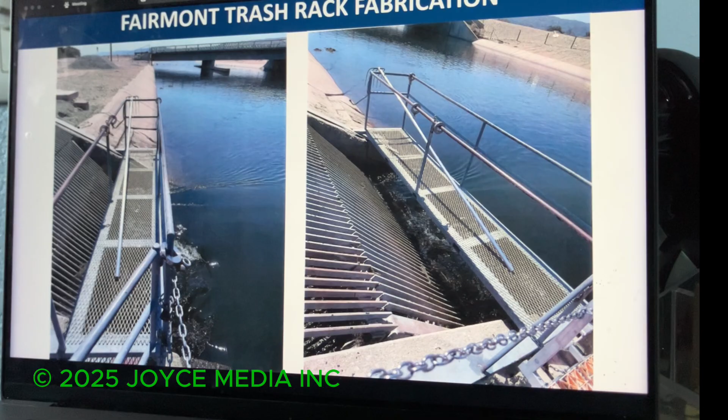Also, while they were out there, Holly, if you go to the next screen - there you go. On the left, way in the background, you can see there's 2 moss screens quite a ways away from the grate. Those moss screens, if you look to the right now, Holly, point to the right, see that hood that's got the opening in the back, it's all dented up. Years of wind, years of heavy things going through the grate, bending that hood up. Now when the sprayers spray that screen, you have moss and algae and things that are just really going everywhere.

So it's just not a good condition. So we thought, well, while we're doing this, why don't we have them build new hoods and new covers for these moss screens? And so they proposed building new covers with access panels out of stainless steel for $35,582 to build and install.

So the total price to International Water Screens to do this work would be $117,552.20, which is quite a savings over the $225,000 that the board had already allocated. So we think this is probably a good way to go.

We did contact Farm Pump and Irrigation because they do screens also. They faded out of the screen business, then they tried to get back into it, and they were non-responsive. There's very few traveling screen makers left in California, so this is somewhat of a sole source. We recommend going with IWS, International Water Screens, for that amount. Happy to answer any questions.

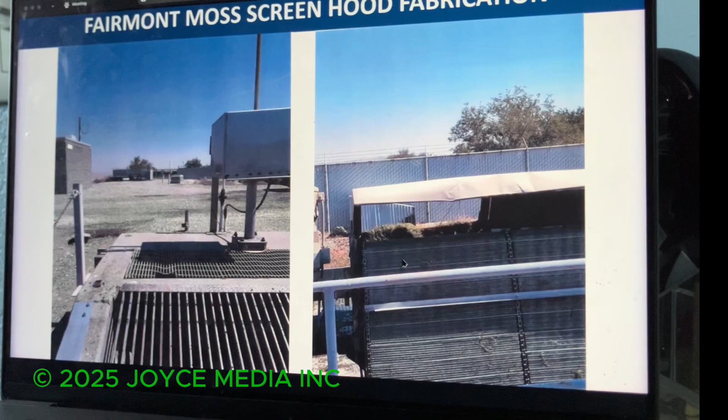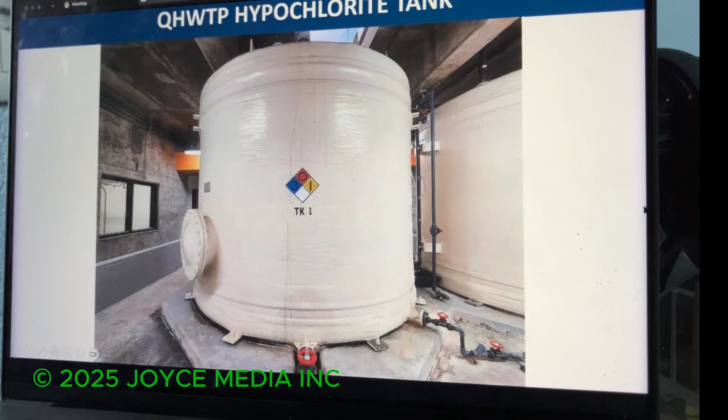Okay, so our last purchase order, if we go to the next screen. So Quartz Hill, this Quartz Hill plant, we transitioned from chlorine gas for disinfection to sodium hypochlorite back in the early 2000s, I think it was 01. So the original two hypochlorite tanks, they're indoor, 8,000 gallons each, are tanks 1 and 2.

Then when we did the expansion, the disinfection byproduct expansion in 2010, we added 2 more tanks. We have 4 tanks, 8,000 gallons each. This tank number 1 is the original tank. It developed a crack, so we had to drain it, dry it out, and we have to get it repaired.

This tank was repaired in 2017 by American Fiberglass. They're an East Coast company, the only one we could find that would come and do this work. They did several tanks for us, but the last couple haven't weathered as well as we hoped.

You should be able to get 12 to 15 years out of a rehab of a hypochlorite tank. So about 3 or 4 years ago, we contacted D&T Fiberglass in Northern California. They came out, looked at what we had, and said they could do the work. They've done about 3 or 4 tanks for us. Their methods and techniques are modern, and they do a great job. So we reached out to them to do this tank.

Now the question is going to be asked, and the finance committee did ask this: why don't we just replace this tank? Why even fix it? I'll let you go to the next slide.

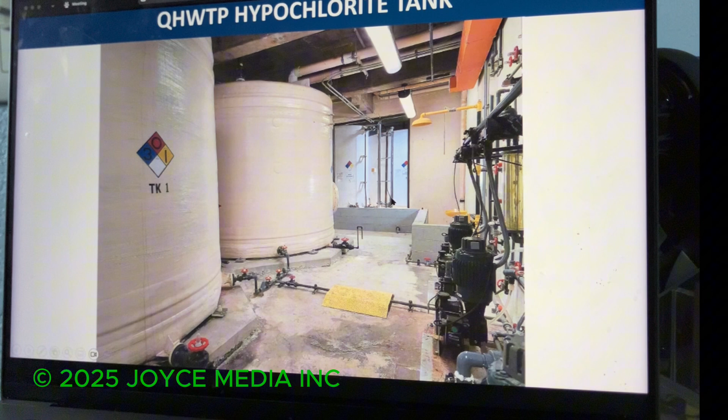A picture's worth 1,000 words. You see way in the distance, tanks 3 and 4. There's no way to get tanks in and out of that room. You'd have to cut tank 1 apart and remove it in pieces, then bring a new tank in pieces and laminate it in place. And the seismic requirements currently are more stringent than they were in 2001, so you'd have to change the anchoring of that tank.

So we feel it's more prudent to just repair this tank. If you have to repair it every 10, 12, even 15 years, you're still money ahead. I'm sure it'd be well over $100,000 to replace this tank, and it would take quite a while.

So we recommend going with D&T Fiberglass to do a full rehab of this tank: new bottom, laminate the sides, new fittings. The total price would be $47,400, and they can get it on the schedule probably in October or November at the latest.

Happy to answer your questions. I have a question, John. What about the seismic considerations? Is there a big difference?

Not a huge difference. You'd have to add more anchors, but Rob raised some good points on this. My response would be, if you're going to do it to this tank and that adds cost, why wouldn't you do it to all the tanks? My feeling is, were the seismic requirements in 2001 insufficient? Are earthquakes bigger these days?

I think it's like anything with engineering, no offense, but I think engineers look for ways to generate work by increasing seismic requirements. Some are necessary, we saw that from the Northridge quake, that's when a lot of things changed in '94, whenever that was. They became very strict. So I think the '01 seismic requirements for tank anchoring are probably sufficient to what we have now. I don't think we should spend a lot of extra money to do that. That's my opinion.

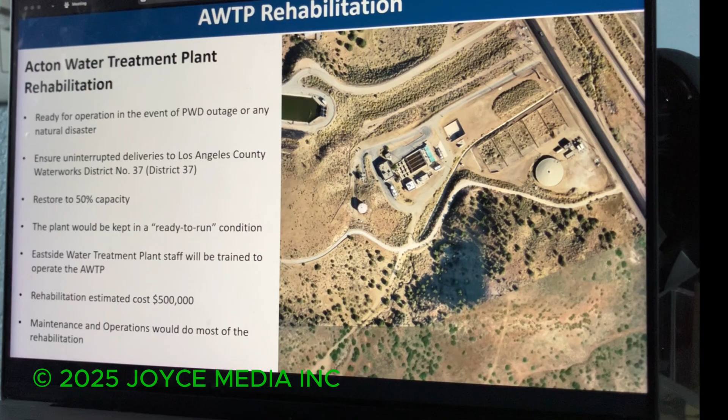So, timeline: 1990 built. 1993, the county said, hey, we don't need the plant, take it offline, we have plenty of well capacity. So we took it offline. 1998, development out at Acton, they said, hey, let's bring this plant back online. So we did that. Then in 2008 we did the DBP upgrade, and in 2010 it was complete. 2011, we did the agreement with Palmdale Water District, which has worked very well for us.

So here we are in 2025. The question I would ask is, why now? Why now? There you go. So you think alike - so why now?

Well, have you guys noticed that we've had a lot of leaks lately? We're coming to you with leaks - we've got to repair this, we've got to repair that, because systems are getting older. And Palmdale's systems are getting older, just like AVEK's system. Thus far they've been very dependable, but perfect storms happen all the time in our personal and professional lives, and it happens. So we're vulnerable. If Palmdale can't supply water, District 37 isn't going to look to Palmdale and say, hey, we have an agreement - they're going to look to AVEK. So we looked at options: if we can't get water from Palmdale, what would we do? And the only viable option is to get the plant back in shape to run. I can't think of any other options - we beat this thing to death, there's just really no other way. So that's why we're bringing it to you. We've identified a vulnerability, a risk, and we think risk versus reward - $500,000 is a lot of money, but the risk is greater if we can't provide water, especially if it's in the middle of summer.

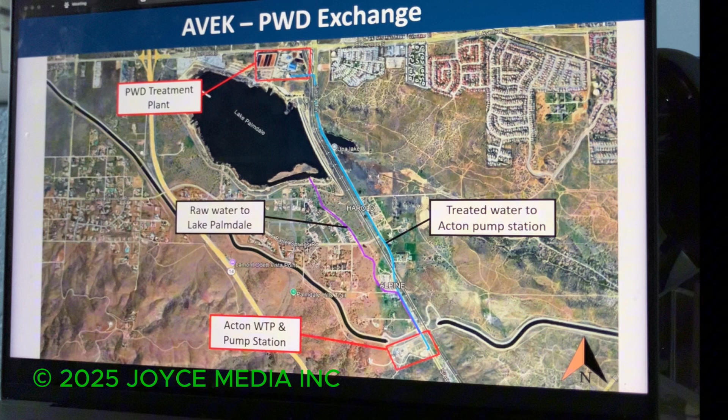So as we talked about, estimated cost would be $500,000. The Water Projects Committee looked at this and they were in agreement. We recommend rehabilitating it to ensure it's ready for operation in the event of a Palmdale outage. This agreement with Palmdale is beneficial to both of us, and we'll keep it going hopefully forever. We'll keep the plant in ready-to-run condition with the Eastside Treatment Plant staff. That's all I've got, happy to answer any questions.

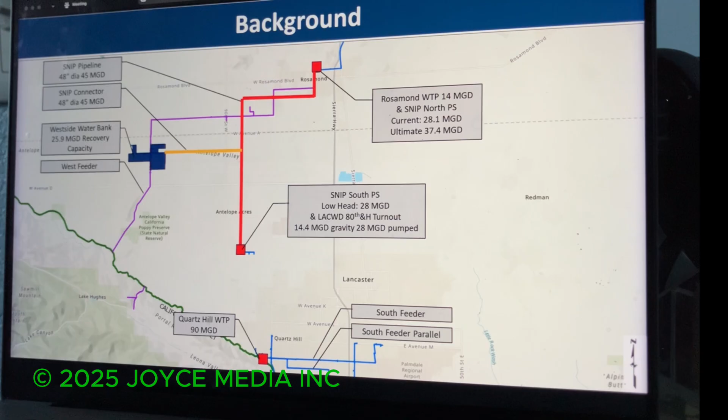And if we click forward, next slide, there we go.

Here's a photo of the SNIP North Pump Station. This is at the Rosamond Water Treatment Plant. You can see the building in the photo on the left. We've got the pumps that you can see inside the building on the right, and those are pumping, as I said, into the west or central feeder up to the Mojave Tank Farms.

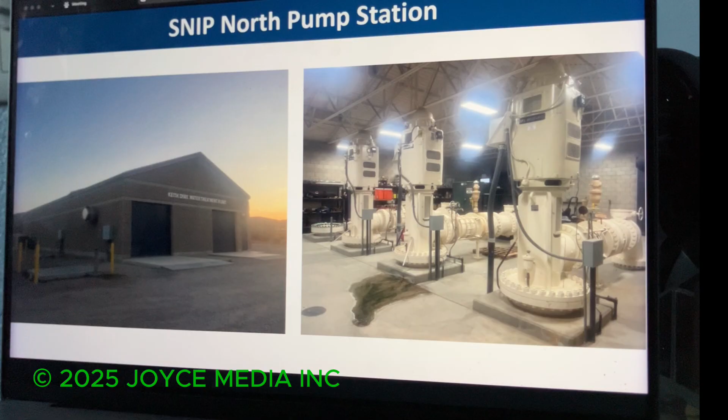Next slide. This is at 80th and H. You can see that building on the left - that's a pretty large building, about 800 square feet, give or take. And the pumps that you see in the foreground here are the 3 low head pumps, designed to pump water into the LA County Waterworks system at 80th Street West and Avenue H.

In the background, it's difficult to see, but behind those pumps are pump cans that were installed with the construction of this building. All the provisions for SNIP Phase 2 were installed as part of the construction of all the facilities there at 80th and H. So in the background, we've got 5 pump cans there to accept future pumps that would be used to pump up the hill to the Quartz Hill Water Treatment Plant along with SNIP Phase 2.

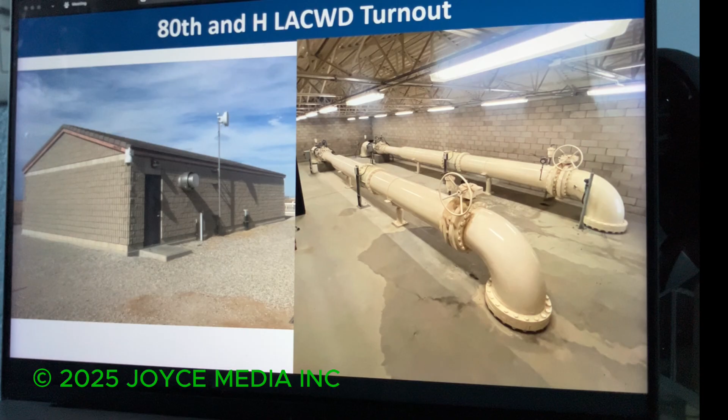Next slide, one more photo. This is the LA County Waterworks turnout at 80th Street West and Avenue H. There's a building inside of the building. We've got the flow control and metering pipelines that deliver the water into the LA County Waterworks system. So again, all already constructed.

This is the same map that we started off with, but now the yellow shaded boxes describe some of the facilities that would be constructed as part of SNIP Phase 2. So we've got about 6.5 miles of 48-inch pipeline, which matches the capacities of the existing SNIP Phase 1 system.

The pump station improvements that are needed - as I mentioned, the building is already there, and all the underground piping to connect into the SNIP Phase 2 pipeline is already there. But we would equip 3 pumps out there. I mentioned there's space for 5 at this point in time. We're planning to equip 3 of those, 9 million gallons per day each, for a capacity of 27 MGD.

But we do have the future capacity to get all the way up to the 45 MGD if needed. That currently matches the capacity of the West Side Water Bank recovery well field, and then we can deliver water through 80th and H as well. So we've got that. There's also 2 new surge tanks that are going to be needed at that site, and then we've got, as I mentioned, the pipeline. So those are the new facilities associated with SNIP Phase 2.

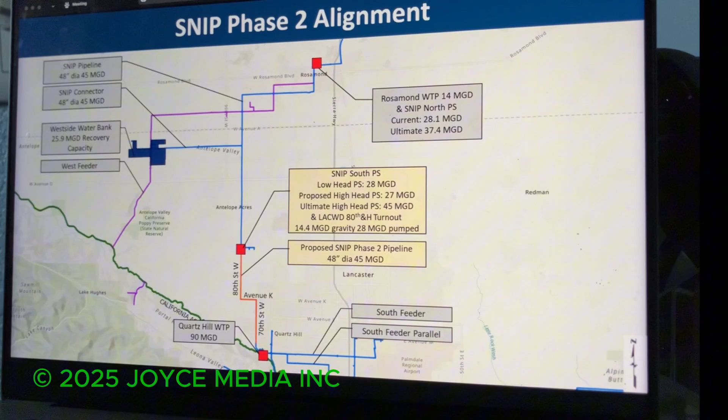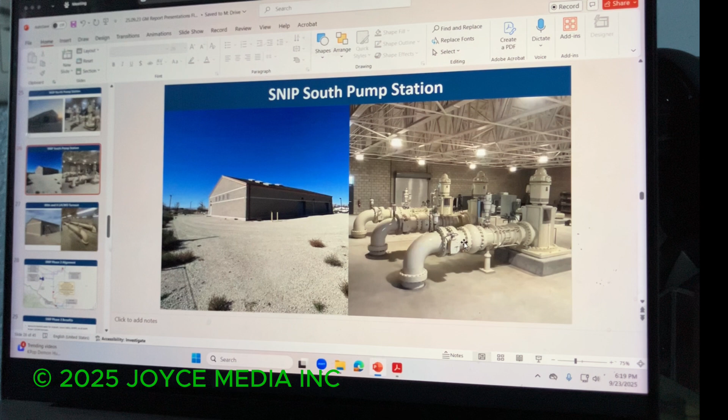Just quickly, what are we doing here? That was fast. Yeah, any questions? There we go. All right.

Just reminding everybody of the benefits we see for SNIP Phase 2, why we approved the design and started on the project. Of course, the biggest one being access to our bank water supplies for the entire distribution system that's served by the Quartz Hill Water Treatment Plant, or historically has been served by the Quartz Hill Water Treatment Plant.

So we are able to recover banked water currently and send that north to our Kern County customers. We can recover banked water and deliver that to some portions of LA County Waterworks system. The maximum that we've been able to deliver to them is about 14,000 acre feet. We did that, I think, in 2021 when we had the second of the 5% years.

But due to some limitations of moving water within their systems, different pressure zones, that's the maximum that we can deliver there. And they cannot wheel water that they receive from us at 80th and H to other parts of their system. So there are some LA County Waterworks turnouts that cannot get the banked water. Of course, none of their mutual water companies customers are tied into any facilities that can receive access to banked water. Neither is our Leona Valley system or Quartz Hill Water District.

So having the SNIP Phase 2 expands the access to our banked water to the system that serves about 80% of our annual demand in any given year. Most of the water that we deliver to our customers is delivered through the Quartz Hill Water Treatment Plant system.

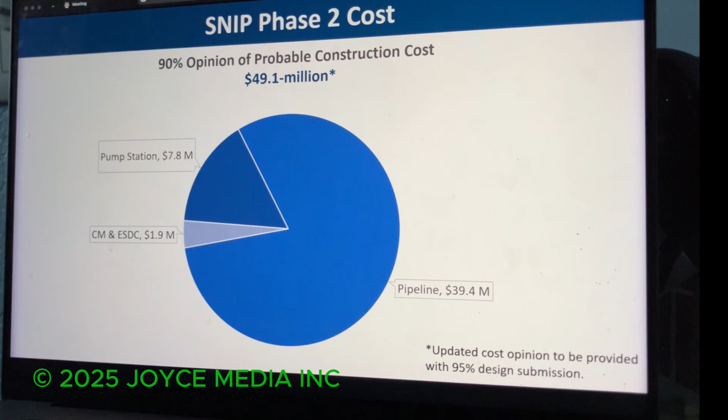The final slide is schedule. I touched on this already, but design should be finalized in November. We bring it back for board approval, and with that approval we would bid the project in the December to January timeframe, then be ready for construction.

When we talked with the committee, we discussed backing out from the grant funding we're seeking, so we've still got some work to do there. We have not adjusted this schedule for where we're at on the grant. We're still talking to the folks we're working with to figure out what that timeline is, but this could push maybe 6 months or so out into the future so we can award the construction in a timeframe where we'd be able to utilize the grant funds.

That's it as far as the status update, but happy to answer any questions anyone might have.

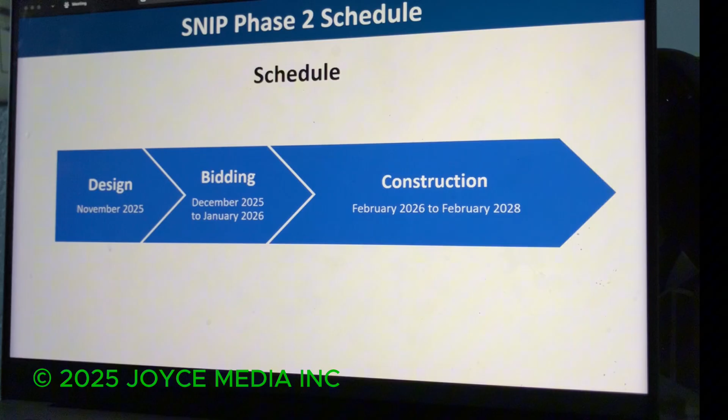Any questions or comments? How much were the grant funds for this project? We received about $6 million through DWR, and we're currently seeking more.

Irrigate lawns and water lawns as usual, but we're not the primary supplier, at least we haven't been for decades. I hear a lot of discussion about what if, and it could happen someday, something probably will happen, but if you look at the cost to be 100% reliable, you're going to price people out. We already have priced a lot of people out—if you drive by and look at people's yards. But anyway, Keith knows very well, for decades we've emphasized we're the secondary supplier, not primary, and I haven't heard much talk about that on this board in a number of years.

George, this is Keith. You make a great point, and it's also wise for us to emphasize this to our customers occasionally, that they must find ways to compensate in the event we have a reduction of flow from Northern California into the California Aqueduct. We can't control everything up there. Very good point, maybe we need to work a little more on that. Good point, Keith.